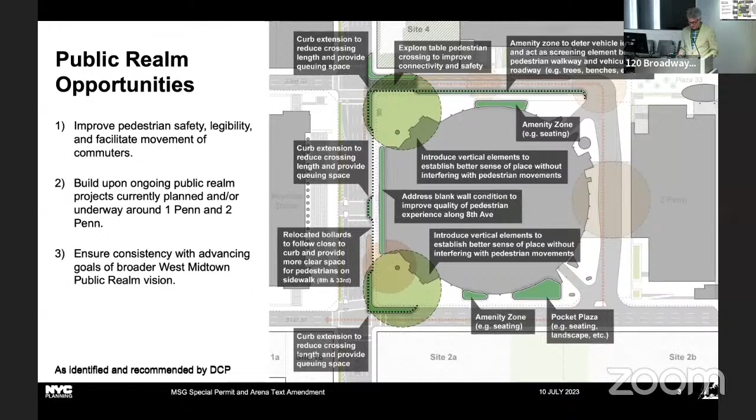Then we have the 8th Avenue frontage, which is literally a blank slate, and this is a great opportunity to do something related to the civic importance of the site that could be engaging and interesting and have a positive impact on the public realm.

So there's this idea of creating a notable civic entrance on the corners of 33rd and 31st Street for the Penn Station entrances—adding vertical elements to the corners and tying this all together with a unified design, a plan that shows consistency and a hierarchy of signs with improved lighting.

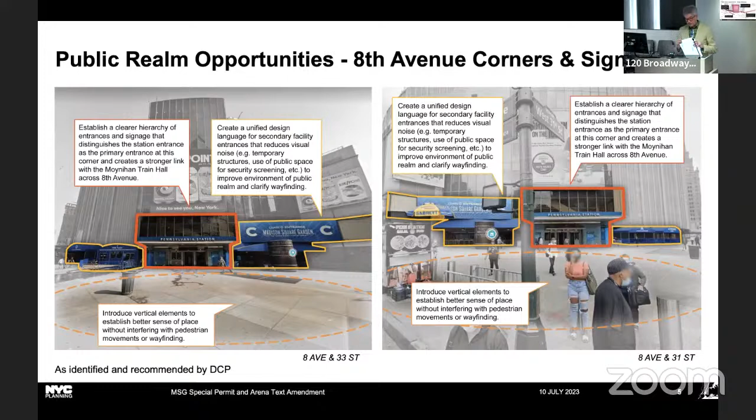And this is the concept drawing that the department put together, like the previous three slides. It's focused on the unified and consistent design and having a notable entrance into Penn Station.

Now I want to take you through MSG's commitments, which came post-public hearing and are in addition to the proposed improvements from February that I showed earlier—the planter benches, bike parking, and the POP signage. They've added a third planter here in the southeast corner at 31st Street in the mid-block.

This really highlights how this could become a significant public amenity with social seating and people sitting around in the landscaping. This is also a southern exposure, so I think this will be very beneficial with direct sunlight and a good landscaping feature here. I think this gives the start of a real POPS feeling—a New York City POPS feeling here.

So that additional planter is very much a concrete idea and design that was too late to include in the proposal. But the next couple of public realm improvements and commitments are more on a conceptual level.

This is one of those, from their most recent letter to the Commission, just last Friday on the 7th. The applicant has proposed a design concept of a 3D lenticular wall, or art wall. This particular concept has different views depending on where you're sitting or standing and what angle you're at. It will not have any advertising or accessory signage, but it will be related to celebrating the city and highlight the civic importance of the site.

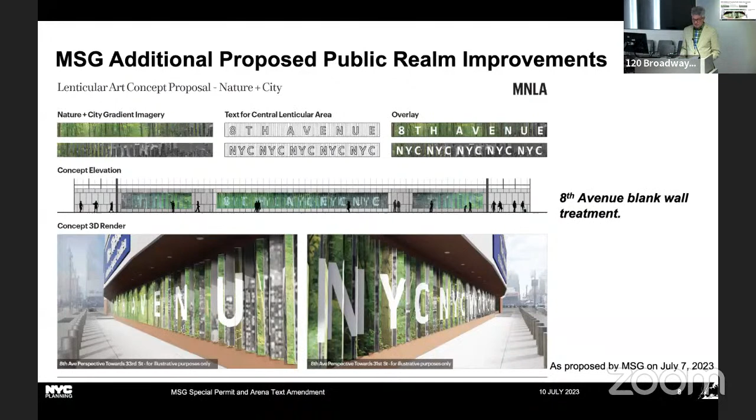The applicant has committed to providing a unified signage scheme and design language related to the signage and canopies, and they've retained a graphic design firm to do this. They have a preliminary concept design proposal to allocate space to Amtrak to put up some Penn Station signage at this corner, or both corners on 8th Avenue. This would make a more significant entrance, a grand entrance into the station on the 8th Avenue corners.

These show a glass canopy with lighting, the letters up, the name Penn Station, and obviously it's much more identifiable than what there is today. These canopies could extend over the plaza areas on the corner spaces and have a lighting scheme to illuminate them and highlight the station, reinforcing the relationship between the public spaces and Penn Station and giving these entrances a more prominent civic importance on the site. So now you can walk down the street and you won't be saying, where's the entrance to Penn Station?

We have discussed among the commissioners MTA bollards on the site, which MSG does not control. But we've also discussed how there are metal barriers littered everywhere around the site. You can see them here around security features, against the trucks, and you can see that woman with her luggage standing next to one. I've witnessed people trying to walk around with their luggage in that area, and it's very difficult, and you're not exactly sure where you're supposed to be going.

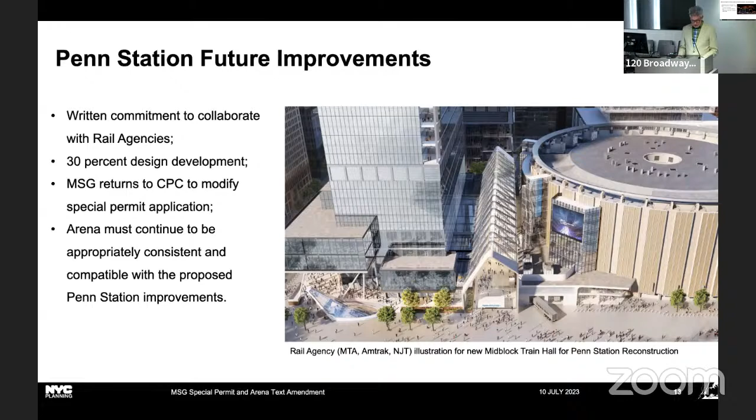The applicant, MSG Arena LLC, requests a special permit to allow an arena with a capacity in excess of 2,500 seats. The requested action would facilitate the continued operation of the MSG Arena. In conjunction with that application, the department is proposing a text amendment as modified to amend this arena's special permit to incorporate additional required findings related to public spaces, open areas, loading operations, and the consistency and compatibility of an arena with transit facilities.

The two chair certs that are up on the screen are set up so that if the application is approved, then the applicant would have to return within 6 months and submit a proposal. It doesn't have to be approved in 6 months—they just have to submit something to Dan, to the chair, for review.

The department believes that with these improvements the applicant has proposed related to the public realm, and their commitments to further public realm improvements, the loading operations, and the transit improvements, MSG has met the findings as modified. The department believes these modifications to the text amendment related to the chair certification process and the requirements for the public realm and transportation management plan will ensure further development of these proposed improvements, and that they are also consistent with the applicant's commitments.

Regarding the special permit term, the department recommends a 5-year term. The purpose of the term is to allow for a reappraisal of whether the use continues to meet the relevant findings and conditions. This is a very complicated history here, and it's going to be a very complicated future at the site also.

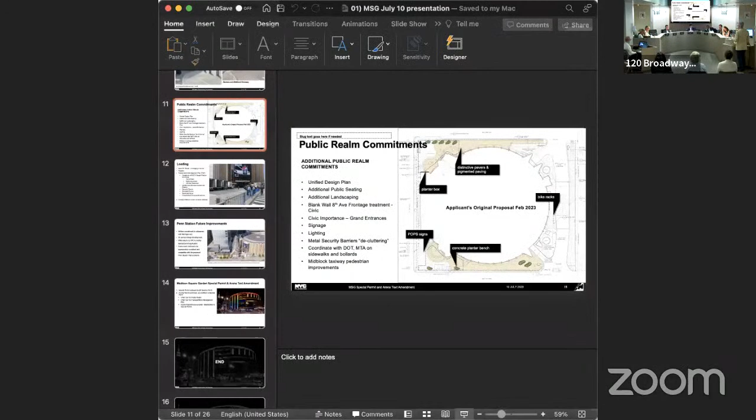Sure, go back to that slide. The issue is the things they proposed in February—they also have time to implement those proposals, because that's something they can't just make appear out of nowhere. They have to fabricate the planter benches, they have to get the design ready for everything. So it's not something that can happen quickly.

So there's a window when they can do that too, which is approximately 2 years. And with the chair certs, that 2-year window starts when those two sets of chair certs are approved.

So when you look at these particular ones, they don't yet have a unified design plan. They've identified one location for additional public seating and landscaping, which is that third lima bean-shaped planter. They've identified some concepts of what they can do at 8th Avenue on the frontage, but they haven't come to a resolution on it, and we haven't reviewed anything.

Same with the entrances to the station, the Penn Station entrances. Similar with the signage, they've hired 212, a graphic design firm, to come up with a plan, and that's just initiated.

They just started that. The metal security barriers are something that they're looking at right now, because those are movable and those are not on any plan. So there's no official site plan that has a bunch of metal barriers on it. So they've agreed to look at that and make improvements and declutter that right now.

And then the coordination with DOT and MTA on sidewalks and bollards, that's a future phase when there's funding to extend those sidewalks out. And then the mid-block taxiway pedestrian improvements, they just suggested that on Friday. So I don't think there's anything in particular that's planned or coherent yet to review on that either.

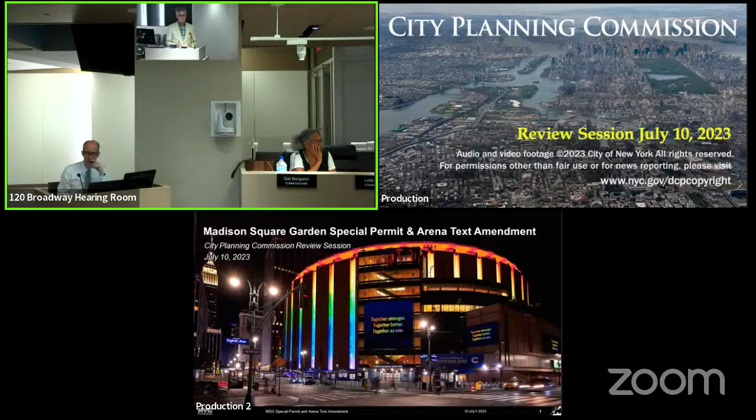So what happens if the chair rejects it at that time? Assuming they come up with a 6-month deadline and the chair rejects it for some reason, that there was no agreement, the language wasn't the way it should be, what happens? The city controls the TMP, working with MSG. So if they're not submitting something that ends up being an approved TMP, then they'd be in violation of their special permit findings and conditions.

So I guess the answer is that they have to come to some kind of conclusion within that time. MSG does, but DOT does not.

We've got other people on the list, so did you have other questions? I'm going to wait - Commissioner, you're going to wait? Okay, Commissioner Cerullo, you're next. Okay.

Stephen, first I share Commissioner Benjamin's compliments to you and to the team, so I just want to begin with that. And I don't want to set the conversation back, but I need some clarification, and maybe the timing is actually appropriate based on this conversation. Could you just clarify exactly what's supposed to happen?

We act this week, the council acts within the next 4 weeks. What's the first threshold trigger date for what occurs next? Is that the 6-month trigger? Yes, that's right. And at that time, what is expected to occur exactly?

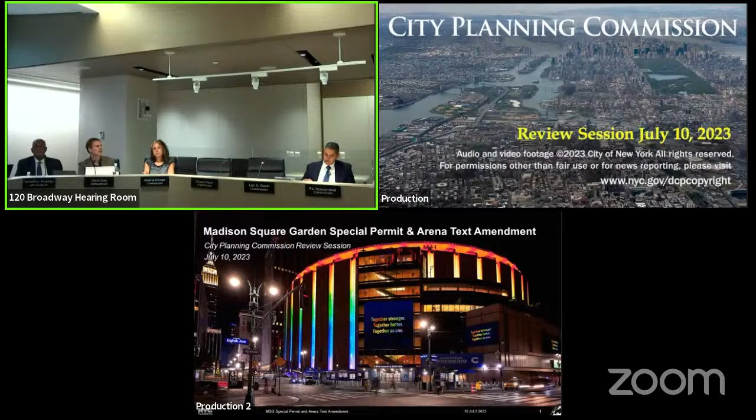The reason that when we think about design development as a threshold, who's to say what 30% really is? So do we have maybe some benchmarks, or maybe we should think about writing in benchmarks of at what point they come forward, because candidly, they may see 30% as a different point than the rail agency, and we may see 30% differently too. So just curious if there's a way—I'm really just thinking about this from a compliance standpoint of simplifying it and making sure everything doesn't seem to be negotiable and arguable. Can we make things more clear for everyone by perhaps picking a couple of benchmarks there? Maybe it's completed plans or something.

Sure. So when we spoke with the rail agencies about this, we asked them specifically about the 30% design, and they gave us a whole slew of their own projects that proceeded along with this idea of 30% design development. We talked about Tappan Zee Bridge. They talked about some of the Metro North stations. And then we consulted other city agencies, and they said this is completely standard, normal, wasn't anything unusual about it. And I think the tension there is more, as you witnessed at the public hearing, MSG is saying we don't have enough information. Clearly they might not have enough information now at this point, but then there's the question of, are they going to say that when the rail agency says that we have 30% design?

But that's also something that's going to be discussed with city planning and the commission, and we will have different people consulting with us about whether that 30% design standard works, and whether the rail agencies are asking too much or not enough, or MSG is refusing to do something, or they're okay with it. So I think we have built into the system that the review of the 30% design and then the review by the commission of the modification will give everybody that information about what the different parties think about it. I would also add that for non-ULURP modifications, the typical thing we see to have enough information to know what's actually being modified on the site plan—we've had non-ULURP mods recently—is at 30%. It's a conceptual thing.

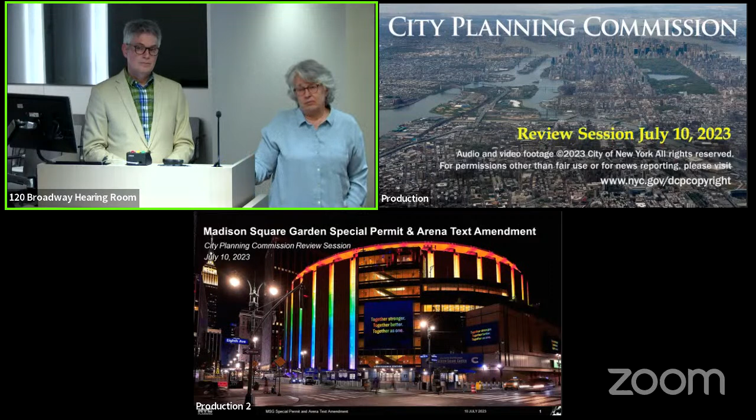I guess the question is, how do we keep some flexibility in case the council comes back with something that wasn't originally planned for? Well, the council can come back with certain things and if they're within scope, they can do it. So we'd have to wait to see what they might come back with, like additional requirements.

Presumably, we'd want to know that they could be done within the 2-year time frame, whatever that might be.

Thank you, Commissioner. Commissioner Kirmani? Thank you, and thank you so much for all the work. Just as I'm listening, it's so complicated, and 2 years, 30%, all of this stuff, and MSG

hasn't provided, because they don't know yet, a phased design plan, like what's going to happen first, what's going to happen second. I'm thinking both in terms of a communication tool to the public, since this is such a hot issue, and also a communication tool for us. I'm sure there will be a work plan, there'll be a million work plans, but can we ask for kind of a simple, dare I say, tool, as they begin to decide what to do first? What would a phased design plan be in the 2 years, even if it changes, but something that we can look at, and the public can also use to communicate with the public, like, I'm oversimplifying, planters going in now. Next thing is this.

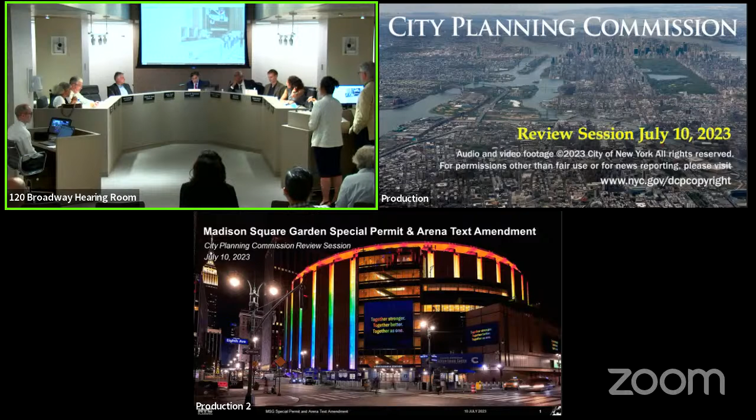So in other words, no agreement, no 30%, no trigger. No rehab of Penn Station. No rehab of Penn Station, but we need them to come to an agreement in order to proceed. So we're all rooting for them to get to that very important place so that we can get that grand new Penn Station, and also we have the opportunity to revisit this question about MSG's compatibility.

And what happens when they submit to the department their 30% plans? What is the next step? The department reviews the plans, the commission reviews the plans, comes to an understanding of... Does the commission review them? In what way? To review whatever the submission is.

This would be a non-ULURP modification, essentially, is how we'd look at it - that MSG would submit documents attesting to how they would in the future still meet the findings of the special permit, given the revised site plan, which would be the 30% documents that we'd receive from the MTA or from the rail agencies. And that would go through a process. We refer those out to the community board. They come back usually in 60 days, and then there is an assent by show of hands to send a letter to the Department of Buildings that this is a non-ULURP modification to a site plan that is approved.

Or not. Or not - it's still a discretionary action. It seems like that 30% mark and the plans will become the subject of a large debate and hearing and process. It doesn't feel like we're anticipating what's going to happen and the amount of public debate there needs to be, if this is essentially the first time the public is going to see the proposed new Penn Station.

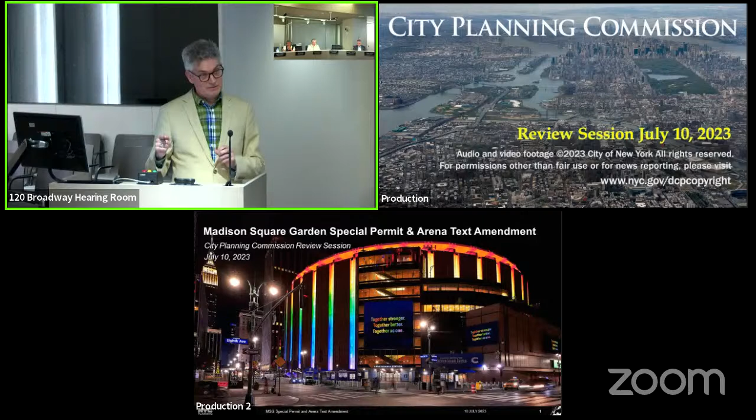But however, what does impact Vornado is their loading, because they load on the south end of the mid-block driveway. So anything that takes away their loading operations—they don't do much loading there, they do it mainly over on 1 Penn—but that still would be impacting their loading operations.

Well, where is the loading for all of the retail that's below grade? How do they get their stuff? It depends on who's got the retail.

So Amtrak uses the southern internal entrance into the arena. They have that internal bay. Trucks park on the street if they're coming in and out quickly. If it's MSG and they have smaller trucks, they can go on into the building.

And then Vornado—Vornado's been talking about how they're going to get some of their retail sites going. That would probably go through 1 Penn, because they have a nice loading facility below that building.

And the underground retail that's in Penn Station, how do they get their deliveries? So they would use the internal loading bays inside the arena, because Amtrak controls the southern entrance access into the loading bay, the internal loading bay at the arena.

We thank everybody for their attention and comments. Ryan, let's move on to the normally scheduled agenda, the certifications on the list. The second item on our agenda is the certification of a zoning map and zoning text amendment in Staten Island Community District 1, and our presenter is Kari Bailey.

Hi, good afternoon, commissioners and Chair Garodnick. Can you hear me? We can hear you fine. Great. My name is Kari Bailey, I'm the Staten Island Borough Planner, and I'm presenting 541-545 Bay Street, which is a rezoning and extension of the Special Bay Street Corridor District, also known as SBSC for short. Next slide, please.

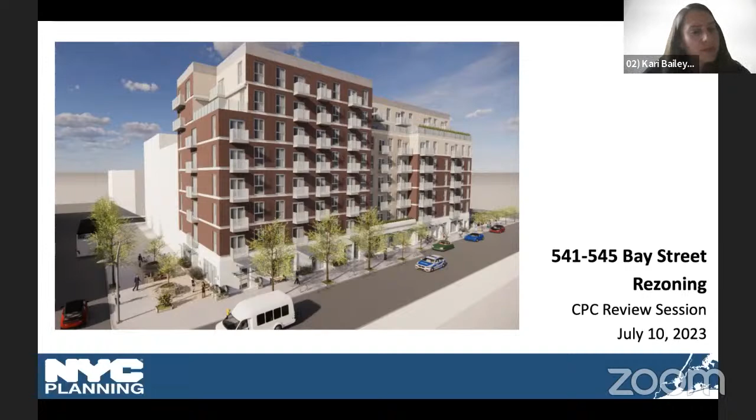This is in Staten Island Community District 1, the Stapleton neighborhood. A private applicant, Epsilon Enterprises Realty, LLC, is requesting the following actions: first, a zoning map amendment rezoning their development site and the surrounding properties from C4-2 to R6 C2-3; second, a zoning text amendment to make the affected area part of the Special Bay Street Corridor; third, a zoning text amendment to make the affected area part of Mandatory Inclusionary Housing; and lastly, amendments to the bulk provisions of the Special Bay Street Corridor, which affect primary street frontage and height regulations for a particular block.

These actions would facilitate the proposed development of an 8-story mixed-use building with 10,000 square feet of ground floor commercial, 81 residential units above, 24 of which would be affordable, and a rear parking lot providing 42 on-site spaces. Next slide, please.

The Special Bay Street Corridor District was adopted in June of 2019. The goals of the district include creating a vibrant, resilient downtown, providing stronger connections to New York Harbor and surrounding neighborhoods, and supporting the creation of new housing, including affordable housing, for a wide range of North Shore residents. It also aims to foster new and existing businesses and commercial development by encouraging job creation with a pedestrian-friendly retail commercial corridor between St. George and Stapleton. Lastly, the goals of this district also align investments in infrastructure, public open spaces, and services in the Bay Street corridor to support current demands and future growth.

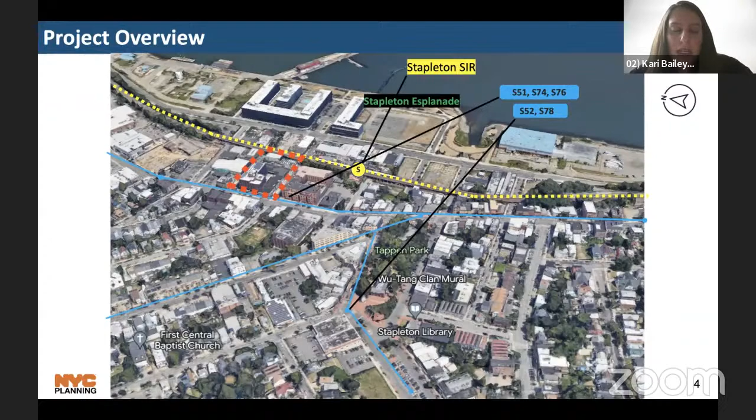The 5 bus route stops are within less than a 5-minute walk from the site, and a bus from this area to the St. George Ferry Terminal is about a 10-minute ride. The site is within minutes of the Staten Island Waterfront Park and Esplanade, and consequently is in the flood zone. Nearby points of interest include Tappen Park, the Wu-Tang Clan Mural, Stapleton Public Library, Makerspace NYC, and the Canal Street Waterfront Observation Deck. In this image, you can see the recent Urby development, the U-shaped building along the waterfront, which started its phase 1 in 2016. That development comprises 571 apartments, 35,000 square feet of ground floor retail, an urban farm, common spaces, 600 parking spaces, and a public plaza. Next slide, please.

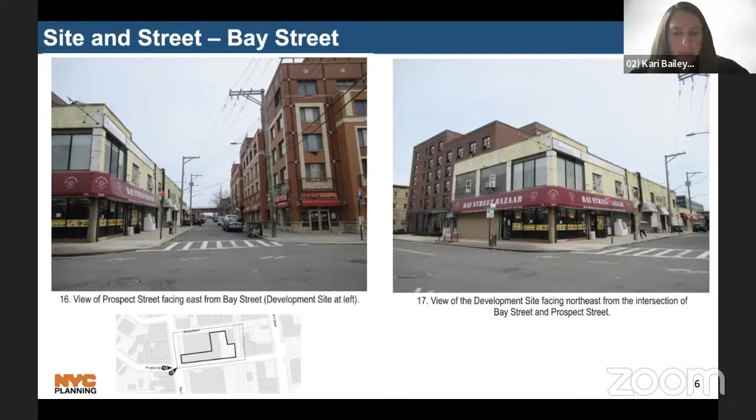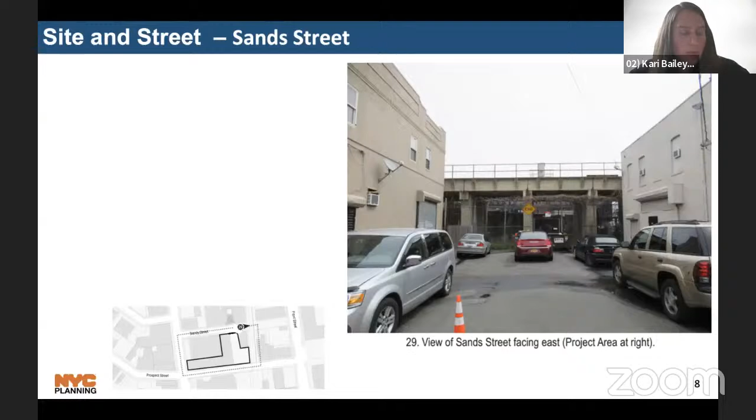The proposed development would have an 8-story building fronting Bay Street, a 6-story building fronting Prospect Street, and a 6-story building facing Sands Street. The total zoning area is 8,448 square feet with 81 housing units, 10,000 square feet of commercial on the ground floor, and 8,740 square feet of parking in the rear for 42 cars.

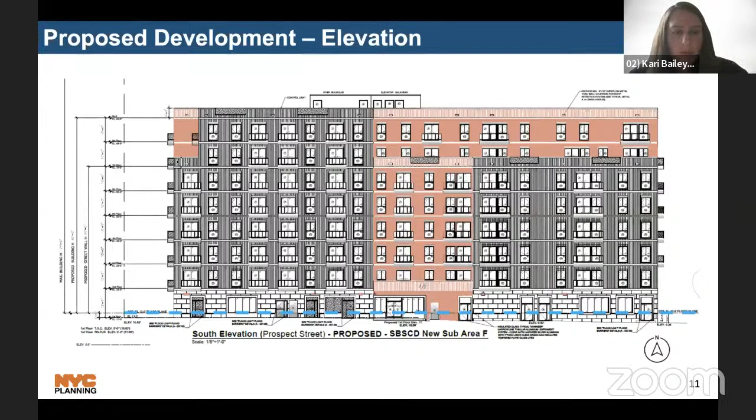The second and third project actions include a zoning text amendment to add sub-area F as part of the Special Bay Street Corridor District and add the area to mandatory inclusionary housing. In the L-shaped development site, it is proposed to use MIH option 1, which would provide 24 affordable units and 57 market rate. However, option 2 and the workforce option would also be mapped in the larger rezoning area. In option 2, or the workforce option scenario, 25 of the apartments would be made permanently affordable, with the remaining 56 to be market rate.

And the final zoning action is a text amendment to the bulk provisions of the Special Bay Street Corridor affecting primary street frontage and height regulations for a particular block, which I previously mentioned.

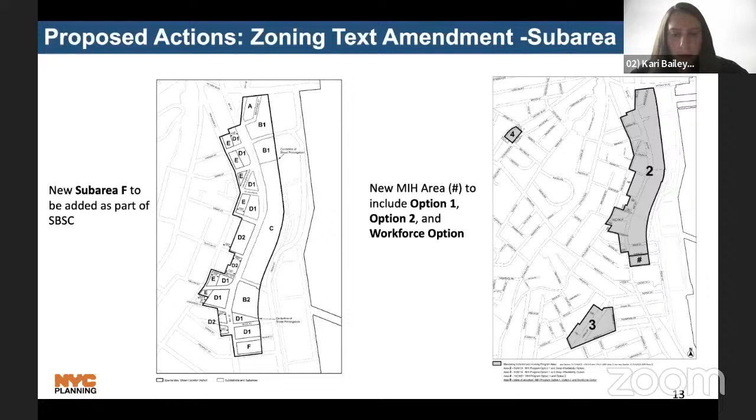I made a note, I think that's the real life picture. Okay, so if you look at the picture to our right, that's the building that's going to come down. You referred to that as being in the street bed. The building to the north of it, the newer residential building, is set back - it's hard to tell in this picture, but it's actually set back. So are we considering this building now as technically in the street bed, or just built on the sidewalk? I'm confused by that. Technically it looks that way, and it is that way, but in the record of the map, it is considered to be the street bed. So then could we assume that even this existed probably before and kind of got grandfathered in? So what we're really saying is that the sidewalk is in the street bed as well - it's just not built to the actual mapped width of the street. Okay, I just wanted to be clear on that, because I know it's going to match the building to the north of it from a sidewalk point of view and a setback, which I agree with completely. So I just wanted to understand that.

There are going to be 3 buildings as part of this development. Will they have different addresses given their frontage - I'm assuming one's on Prospect, one's on Sands, and one's on Bay? So will they have 3 different addresses?

That's a good question. I kind of thought it would just be the project, but I'll look into it and get back. Sure, and two are sort of public realm related.

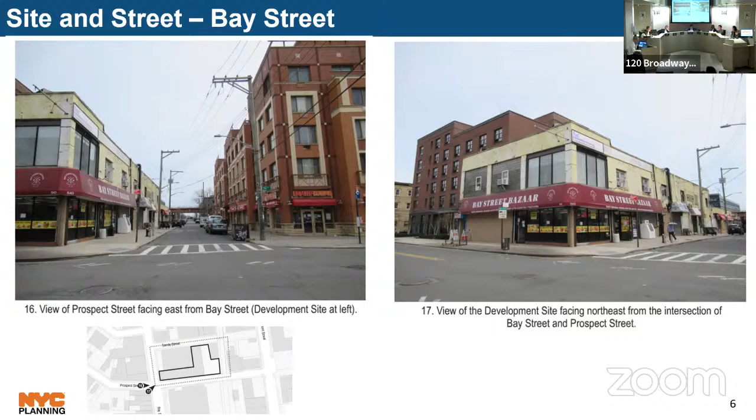You had a photo of the station on Prospect, maybe a slide or two later. I don't remember what slide that was, but I just wonder if there's been any discussion about what can be done to improve this station, given the increase in residential development and use that's going to be part of this.

Never mind people who are encouraging to get out of their cars and come eat in the restaurants in this area, this is actually a really great location for the stop. I just wonder if any of those conversations have taken place.

I'm not aware of any conversations that have taken place, but I can look into it and get back to you. That would be terrific.

And the other is about Sands Street, where you mentioned that's not part of the site, but Sands is the dead end because of the base of the Staten Island Railroad.

This is now going to be the block with an entrance of a residential building. I wonder if there's been any conversations with anyone, whether it's the city or the MTA, who likely owns the land underneath this, to do anything, even if it cannot be opened, which clearly seems to be the case based upon the elevated train here.

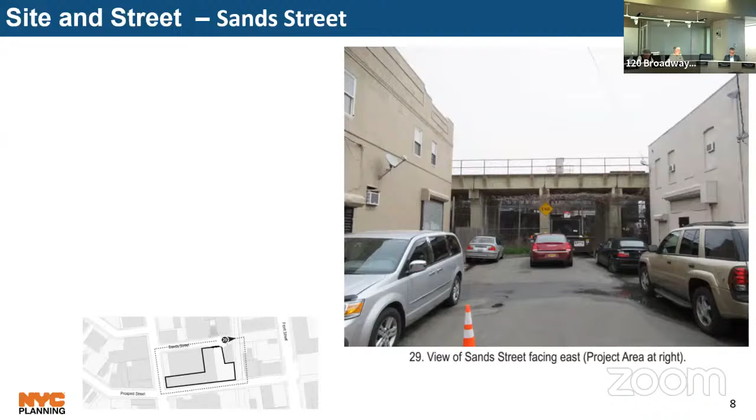We're also mapping MIH here. Why is that necessary if we're extending the Bay Street corridor geography, which is already mapped? Is it because of the new sub-area? Wouldn't it, if we're extending—or are they two separate actions we need to do?

One is to map the geography of the corridor, and the other is to extend the MIH into this sub-area. It's two separate actions. I mean, it's all under the same text action, but it's two separate parts of it. So we have to do the two separately.

Okay, and I like it because I like the options in this one better than the first one, which is where we started. I just wanted to understand why just the extension didn't incorporate everything that had been done in the first part, but it makes sense. All right, I appreciate that.

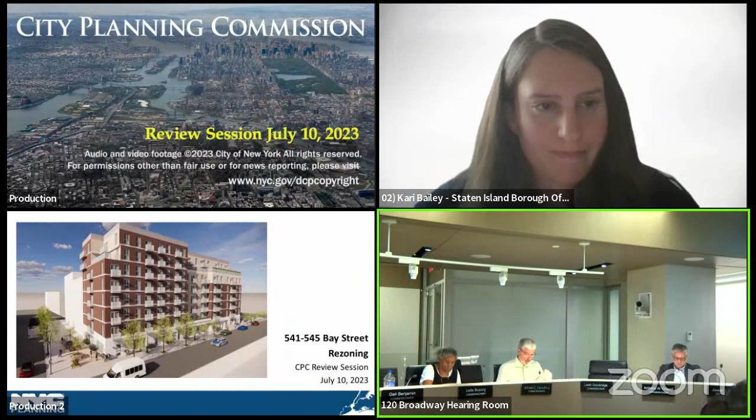Okay, the third item on our agenda is a certification of a zoning map and zoning text amendment in Queens Community District 7, and our presenter is Hai-Kyung Yang. Hello. Good, how are you? Good, almost there.

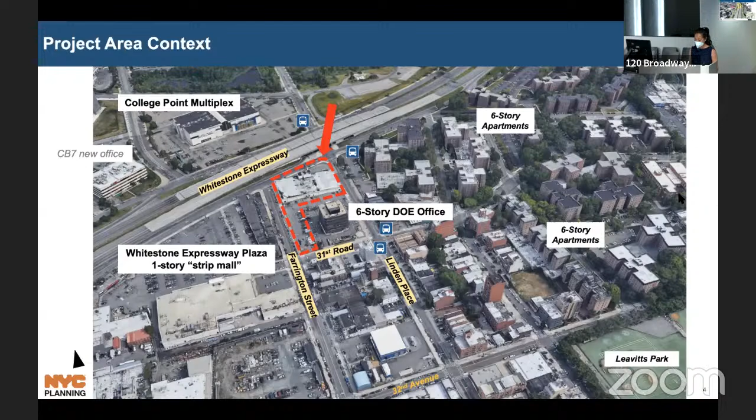This slide is a stitched aerial of the project area. In the dashed red outline is the development site, currently the Whitestone Lanes Bowling Alley. The single-story bowling alley is approximately 37,500 square feet, with surface parking surrounding the parcel. The proposed development site is wholly located within the New York City coastal zone boundary and requires any habitable spaces to be located at 13 feet design flood elevation.

The proposed development would consist of a residential development that will rise to 9 stories and contain approximately 378,000 square feet of area at a 4.6 FAR. This would include 415 dwelling units, approximately 113 of which would be affordable pursuant to MIH option 1. The building would rise to a maximum height of 95 feet and set back at the 7th floor following varied setbacks along Linden Place, the Whitestone Expressway, and Farrington Street fronts.

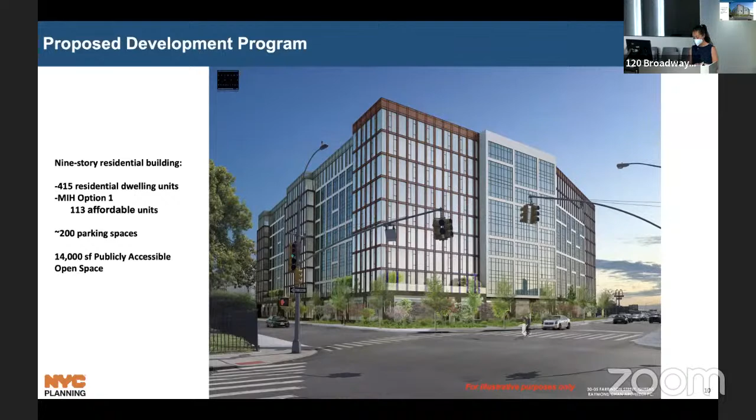The proposed development would also provide approximately 200 spaces below ground for parking, along with 200 spaces for bicycle parking. Lastly, the development would provide approximately 14,000 square feet of publicly accessible open space.

As noted earlier, the development site is in the flood zone. The first habitable floor in the proposed development will be located above the flood plane elevation and follow DOB Appendix G regulations for flood protection.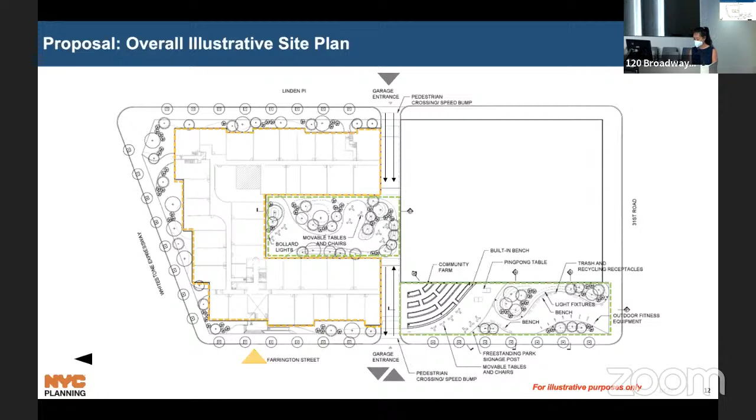The frontage of the development site would include 27 new street trees, and shown at the bottom right of this plan, a publicly accessible area would be provided at the Farrington Street and 31st Road corner of the block, roughly aligning with the dimensions of Lot 1.

The publicly accessible area, shown here in green, has been designed with several sections of activity in mind. This open space is incorporated as part of the development and will be memorialized in a restrictive declaration as a project component related to the environment.

In this specific illustrative proposal, the applicant proposes to have the PAA contain active and passive open spaces, including a range of tree planting and seating. Passive areas would consist of seating and a community garden, while active areas would include fitness equipment and ping pong tables. The space would have hardscape components, which include signage indicating open hours, lighting, trash receptacles, and seating requirements.

As the adjacent DOB building rests at a higher elevation, screening would be provided where the two lots meet, as shown on the far right, section B.

To facilitate this development, the applicant proposes a zoning map amendment to change from an M1-1 district to an R7A district, indicated by the dotted black line on the image on the right. R7A districts produce buildings at a 95 feet or 9-story scale. The transition from an M1-1 to an R7A district allows an increase in residential floor area from none to 4.6 when including MIH units.

This also allows an increase from 2.4 community facility FAR to a 4.0 FAR. The R7A proposal will remove all commercial and manufacturing use group allowances.

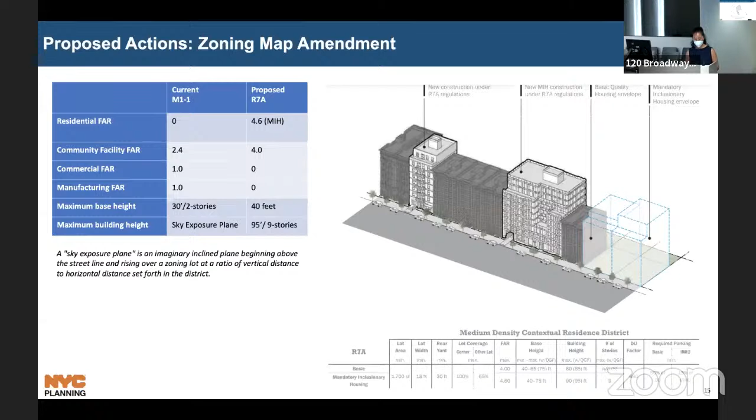The applicant also proposes a zoning text amendment to map MIH option 1 and 2 across the project area. The applicant proposes to utilize option 1 for the proposed development, yielding 25% of residential floor area as 113 income-restricted units.

This application requires a racial equity report because it would increase the residential floor area by at least 50,000 square feet. The AMI for CD7, Flushing, Murray Hill, College Point, and Whitestone area is approximately $55,000, which is lower than the AMIs for the boroughs of Queens and New York City overall.

The applicant proposes to provide 113 income-restricted units across a range of 40 to 80% AMI, with estimated monthly rents ranging from $1,390 for one-bedroom units to $2,780 for two-bedroom units, at estimated average incomes ranging from approximately $57,000 for a one-person household to approximately $115,000 for a four-person household.

Of the approximately 270,930 residents within the neighborhood of Flushing, Murray Hill, College Point, and Whitestone, 50% identified as Asian, 2% identified as Black, 18% identified as Hispanic Latino, and 21% identified as white.

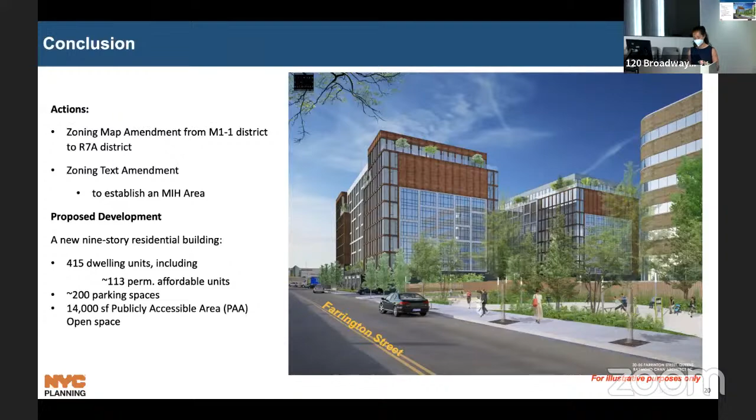Question from Commissioner Rampersad. I'll be quick. Thank you for the presentation. When this comes back to us, if they can provide the breakdown of the number of 1, 2, and 3 bedrooms. Also, what sustainable measures are being used.

I'm just curious, the 14,000 square foot public space, is that the one along Farrington Street? Yes. Is that the area there? Okay, yes. And I want to know the thought process behind that open public area, because it seems like there's a lot squeezed in there.

For example, the community farm, I just want to know who's going to be operating that. Sure, they have a little gym set up there. I'm curious about the thought process as opposed to putting some kind of playground equipment, because the other park has a lot of ball fields. You're talking about 400 families, so I'm assuming there will be children there too. That's it, thank you.

Okay, thank you. Sure, thank you, Commissioner. This item is certified. We'll look forward to seeing it again.

Thank you. The fourth item on our agenda is a certification of a zoning map and zoning text amendment in Manhattan Community District 11, and our presenter is Jose Trucios. Hello, Jose. Good afternoon, Commissioners.

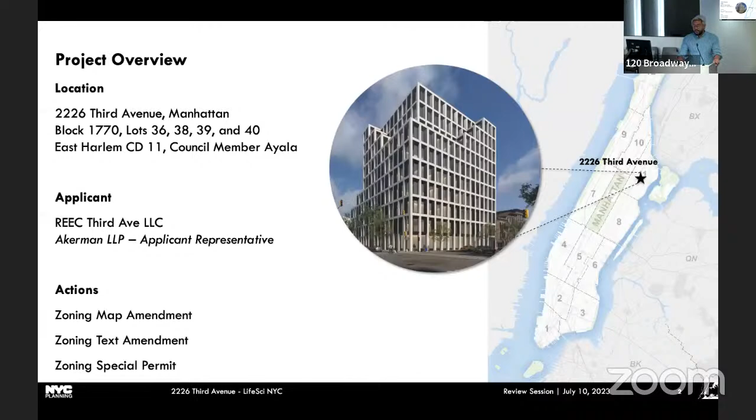Approval of the actions will allow the development of a 10-story, predominantly life science building at 2226 Third Avenue and the southwest corner of East 121st Street and Third Avenue in East Harlem, Community District 11, Manhattan.

The surrounding area is predominantly residential, typified with 5 to 10-story multi-dwelling and high-rise residential towers along the avenues. Primarily underlying zoning districts include C4-6, R7-2, R7A, R7B, and R7D, with commercial overlays on C1-4, C1-5, C2-4, and C2-5, mapped along portions of Park Avenue and Third Avenue.

The zoning in the area features 3 special districts that modify the underlying zoning regulations. Immediately adjacent to the project area is the special East Harlem Corridors district, which is mapped along major corridors in East Harlem. The special 125th district and special transit land use district are located a few blocks north of the project area.

Additionally, within the surrounding area, inclusionary housing and mandatory inclusionary housing designated areas are mapped. These provide affordable floor area incentives to create or preserve affordable housing. The project area is also located within the FRESH zone, which provides zoning and discretionary tax incentives to promote the creation of health-oriented food stores. And last, the transit zone, where lower accessory residential parking requirements apply for certain types of affordable housing.

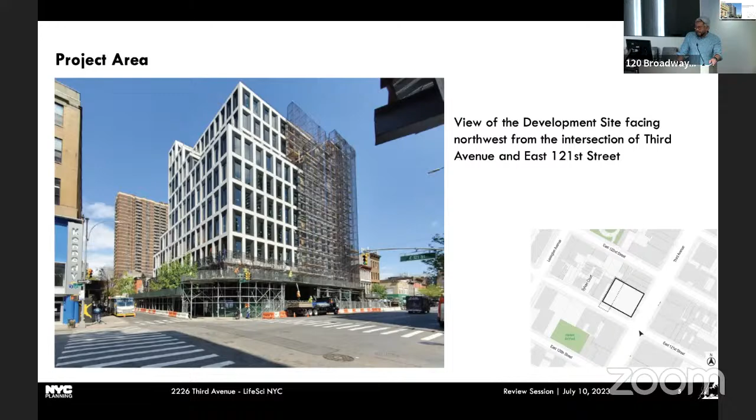I'll look at the actual project area—this is the actual look of the building. This is looking northwest from the intersection of 3rd Avenue and East 121st Street, and now looking from 3rd Avenue between East 120th and East 121st Streets.

This is a view of the development site facing east from East 121st Street. Now I'll look at the proposed development.

Approval of the actions will not modify the DOB-approved plans. However, the proposed development program will change from a mix of medical office and commercial uses to primarily life science type uses. Site preparation work, including demolition of the former commercial building, began in 2021, and construction activity at the development site is expected to be completed by fall 2023.

The portion of the proposed development within 100 feet of 3rd Avenue will be located at the street line and rise to a height of approximately 101 feet before setting back 10 feet from 3rd Avenue and 15 feet from East 121st Street, rising in a step pattern to a total height of approximately 145 feet. The site was previously occupied by a 2-story commercial building occupying 33,000 square feet.

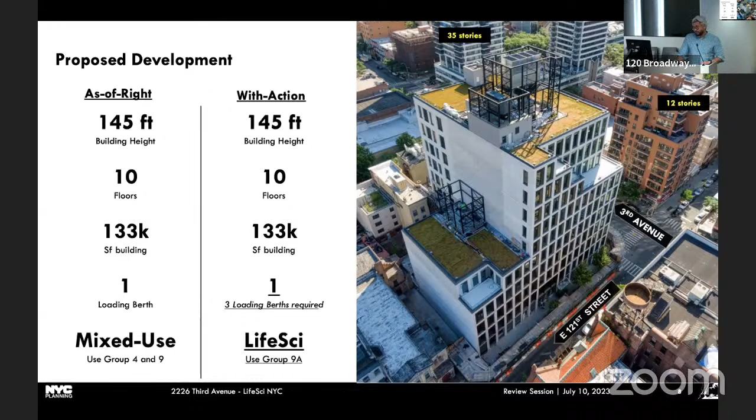Regarding the zoning map amendment: I mentioned that the western portion of lot 36 is the only portion not currently zoned as a C4-6 district. It is an R7B zoning district, and the applicant proposes a zoning map amendment to rezone this portion to C4-6, extending the boundaries of the East Harlem Corridor.

Here's a closer look at the amended zoning map, section 6B, where the zoning boundaries have been extended—the boundaries of the East Harlem Corridor have been extended 50 feet west of the existing East Harlem Corridor boundaries.

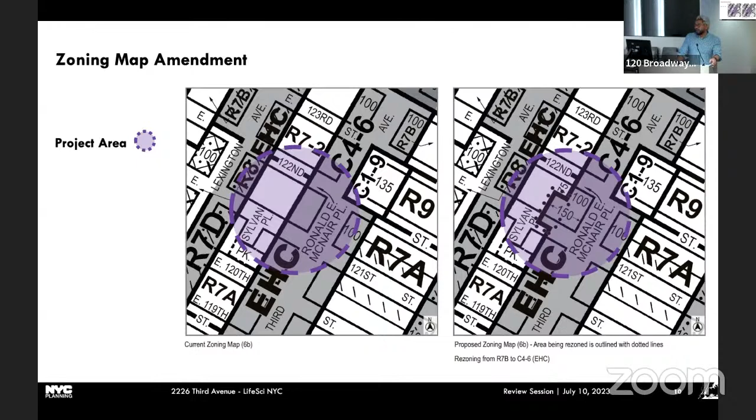The first text amendment will modify Article 13, Chapter 8 of the Special East Harlem Corridor District. This will allow the project area and development site, currently mapped R7B, to be included with a C4-6 district. It will also increase the permitted commercial floor area ratio from 3.4 to 7.2.

The text amendment also maps Mandatory Inclusionary Housing on the development site. Although the project does not include residential floor area, the MIH program will ensure that a minimum of 25% of the residential floor area in any future development that includes residential use is permanently income-restricted.

The text amendment establishes a new zoning resolution loading reduction waiver, potentially allowing the applicant a reduction in the number of loading berths via a City Planning Commission special permit. There are certain conditions related to pedestrian safety, traffic congestion, and the built environment that must be satisfied for the applicant to be granted the special permit.

This comes from Zoning Resolution 36-62, the loading berth requirements, which currently require the applicant to provide 3 loading berths on site. The applicant is seeking to amend the East Harlem Corridor Special District text to effectively reduce the number of required loading berths from 3 to 1.

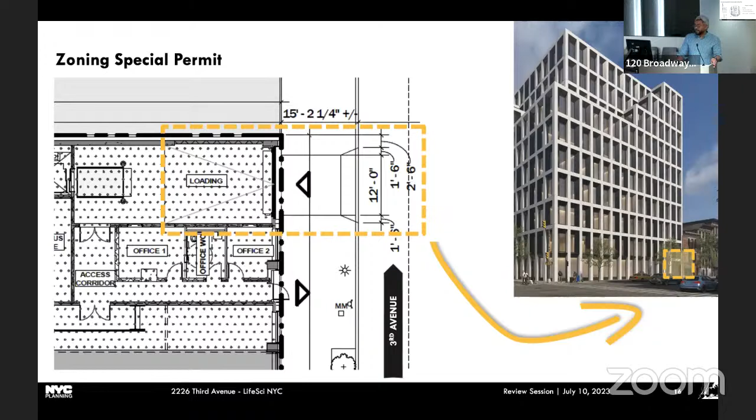A quick summary of the actions. The applicant is seeking 3 actions: a zoning map amendment to rezone the western portion, currently zoned residential R7B, to a C46 East Harlem Corridor District boundary; a zoning text amendment to designate the area with mandatory inclusionary housing; one to map a new zoning section, resolution to a new section within the zoning resolution to allow the reduction of loading berths, and a third one to amend the boundaries of the East Harlem Corridor Special District; and a zoning special permit to apply for the newly created zoning resolution. The proposed amendment will remain very much as it is as-of-right, with the exception that the use will change from medical office space and commercial to primarily a life science building, and 1 loading berth instead of 3 loading berths.

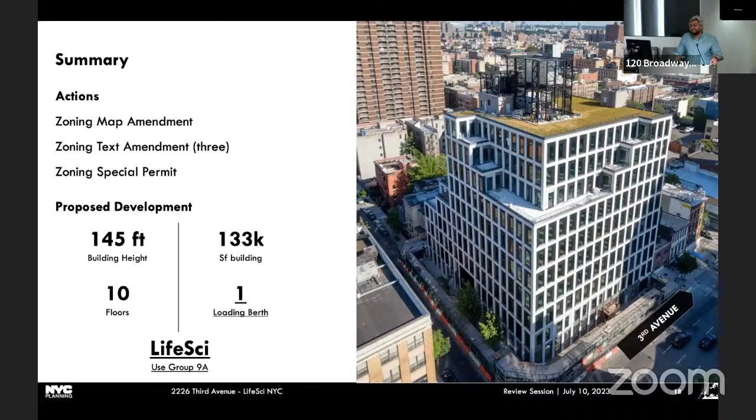Let me just make sure that we're all clear on what's happening. So it is to change the piece of this site that is R7B to make it C46 and make it part of the East Harlem corridor, correct? And as-of-right versus with this change, everything is the same height, number of floors, square footage, but it would require 3 loading berths, which is why we have an associated text amendment to allow for a waiver down to 1, correct? Correct. And it would enable use group 9A, which enables life sciences. In the entirety of the development. In the entirety of the whole building.

Okay, thank you. See if there's other questions, points, anything. Okay, perfect. Thanks, Jose, appreciate it. This item is certified. Let's move on.

The 5th item on our agenda is a post-referral review of a CPC certification in Manhattan Community District 8, and presenting for the first time to the Commission is Ali Song. All right, welcome. Thank you.

Good afternoon, Commissioners. This is a private application by Manhattan Schoolhouse for a CPC certification pursuant to Section 32-435C of the zoning resolution to waive a retail requirement on a wide street, allowing the ground floor to be used as a daycare facility. The site is located at 1538 2nd Avenue in the Yorkville neighborhood of Community District 8.

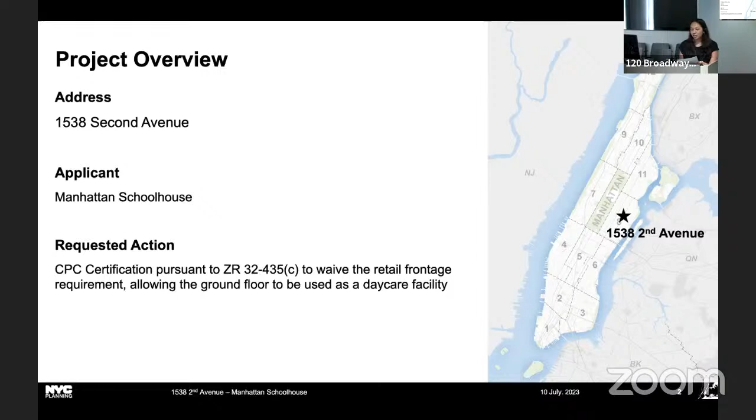This image shows the project context looking northeast at the development site, highlighted here in yellow. The site is located on a block bound by East 80th Street to the south, East 81st Street to the north, and First Avenue. Should I pause? Sure.

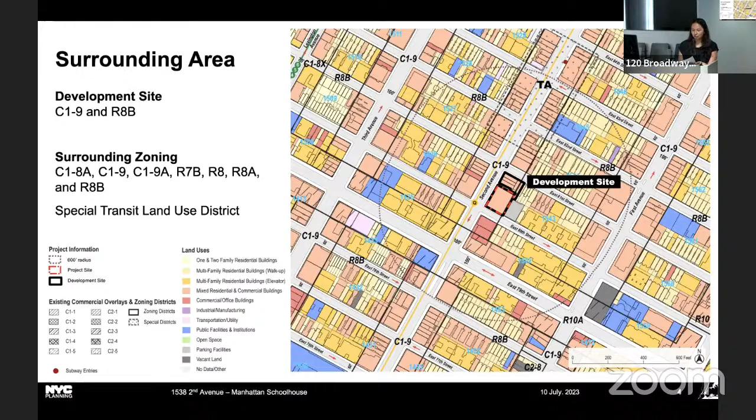Taking a closer look at the development site, outlined here in red and oriented northeast, the zoning lot is composed of 6 tax lots, lots 49, 50, 51, 148, 149, and 7053 of block 1543. Altogether, the zoning lot contains 20,745 square feet.

Lots 49, 50, 51, and 149 of the zoning lot are each improved with a 4-story mixed-use building, and lot 148 is improved with a 3-story mixed-use building. All 5 buildings contain residential uses with ground floor commercial space.

Tax lot 7053 is the largest southernmost lot, located at the corner of 2nd Avenue and 80th Street, shaded here in gray. It's improved with a 30-story mixed-use building constructed in 2019. The ground floor of this building is the subject of the application, where Manhattan Schoolhouse is seeking a retail frontage waiver for a daycare.

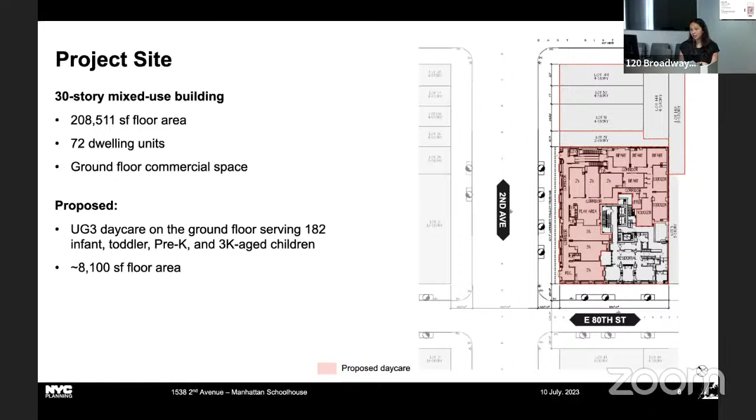Daycare facilities like the one proposed in this application fall under Use Group 3 and are therefore not allowed to take up more than 50% of the building's frontage as of right.

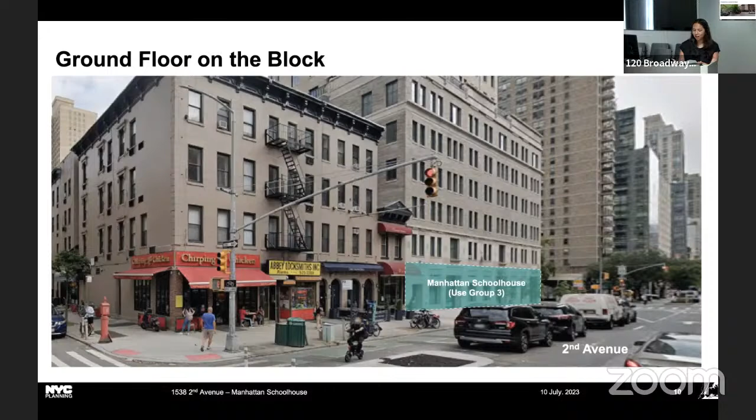Including that an adequate supply of retail uses on the ground floor exists in the surrounding area. The department believes that this application has met the finding and recommends approval. There are several retail uses in the surrounding area, and the applicant further submitted a letter confirming that a good faith effort was made to secure a commercial tenant.

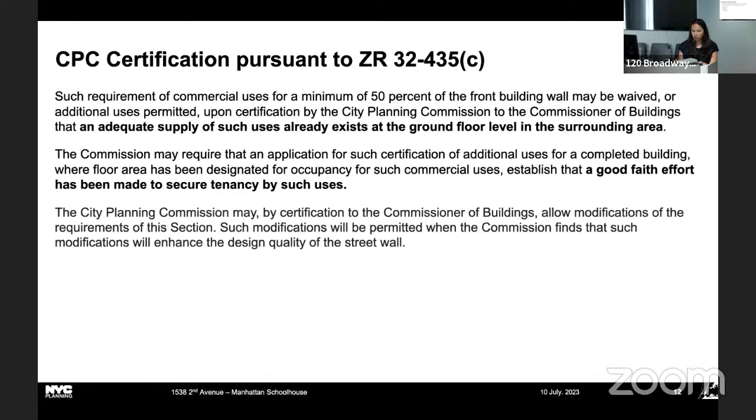This application was presented at the land use meeting of Community Board 8 on June 14th. The board passed a resolution approving the project with 32 votes in favor, 0 opposed, and 3 abstaining.

In summary, the applicant is requesting a CPC certification pursuant to Zoning Resolution Section 32-435C to waive the retail frontage requirement to facilitate a daycare along the full frontage of the building at 1538 2nd Avenue. Thank you, and I'm happy to take any questions.

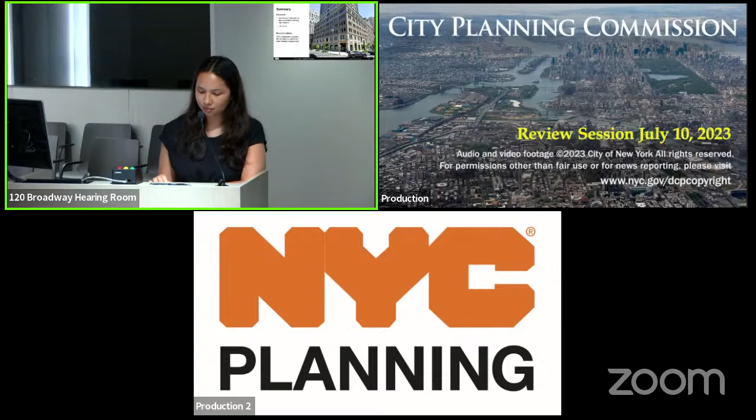This all looks fair enough to me. I just wanted to understand the waiver requirement. So the requirement is that an adequate supply of such uses here, which I guess is retail uses, already exist in the surrounding area. I guess what I'm confused about is what are we supposed to be evaluating here? There's an adequate supply of what? Of spaces that are occupied by use groups 6A, 6C, and 6F? Or is it there's an adequate supply of vacant space? What are we trying to evaluate here?

That there's an adequate supply of the commercial uses in 6A, 6C, and 6F - so retail uses, shops, restaurants, stores, things of that nature. So if I guess what I'm thinking is if you had just a lot of retail vacancy, which I suspect is certainly part of what's going on here, that would suggest that you don't really have an adequate supply of those retail uses because they don't exist, but you also would want to grant this waiver because there's no demand for the space, or less demand for the space. So this is really a question that I'm trying to figure out what this was designed to get to.

It's obvious that they made an effort and were not able to get the conventional 6A, 6C, and 6F in there, so they went for something else. Yeah, I see what you're asking. I think that the way that the text is written, it's asking if there's an adequate supply in the area, which I think that in the case of this application, that's why I showed the surrounding area. You can see that on the streets adjacent, or next to the site, there are these commercial retail uses. But I see what you're saying about how it's written. I think that might be why there's this additional requirement - the commission may require that you provide this good faith marketing effort letter, which the applicant did provide, showing that they made an effort to secure a commercial tenant, but were not able to.

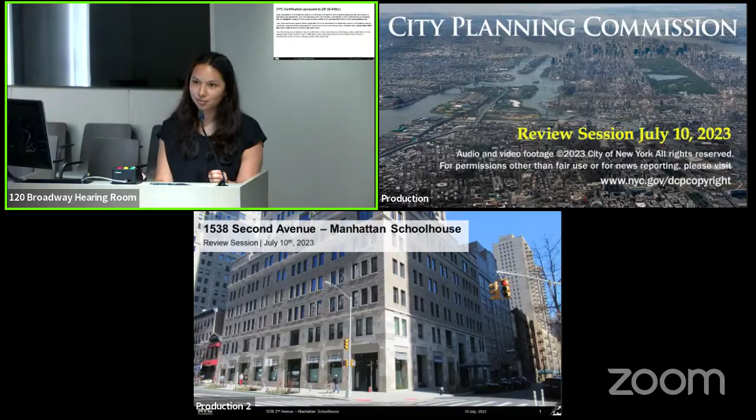Thank you. All right. We are going to do this one by a voice vote here, just to prepare everybody. I've got 7. You got 7? Okay. So we're going to seek assent by voice vote to send an approval letter on this one to the Buildings Department. Everybody ready for that? Yeah, we're ready. Okay, all right, ready. So all those in favor of sending an approval letter to the Buildings Department, please say aye. Aye. Opposed, nay. Okay, the ayes have it. Ayes on. Thank you very much.

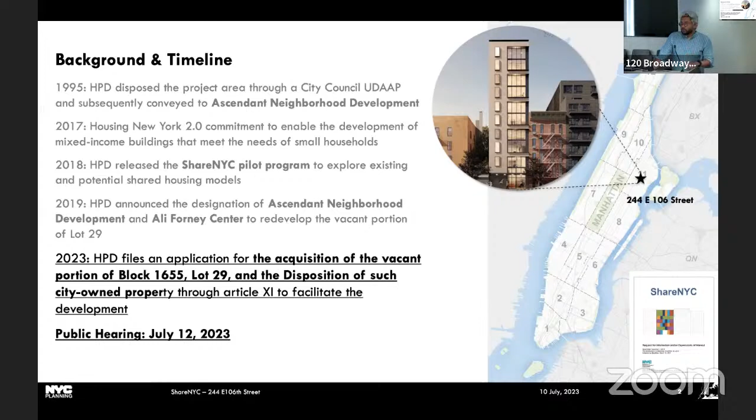In 2018, HPD launched their co-living program, seeking proposals for development. They picked Ascendant Neighborhood Development and Ali Forney, prompting this application for the acquisition of the remaining portion of the lot for subsequent disposition of the lot through Article 11.

Quickly on the project overview, on the right side you can see the existing conditions on the site. As I mentioned, it's only the vacant portion of lot 29, so it's very minimal and limited to about 2,700 square feet. It's a tiny lot that is limited by the zoning resolution to only stand at 100 feet or less, so this building is at 99 feet.

It will be occupied by shared housing, consisting of 2 or more independently occupied rooms that share a kitchen or bathroom, a housing type that can encompass a wide range of configurations and usually includes additional building-wide common spaces, designed to encourage the sense of community and create a home-like environment.

The proposed development will contain approximately 21,000 square feet of total floor area, including 19,000 feet for shared dwelling units of nonprofit institutions for sleeping accommodations, use group 3, and about 3,000 square feet for community facility for supported social services. This translates to 4 shared housing units, 1 superintendent unit, creating approximately 32 affordable rooming units.

No accessory off-street parking will be provided. It's not required for affordable units within the transit zone, within the special transit district.

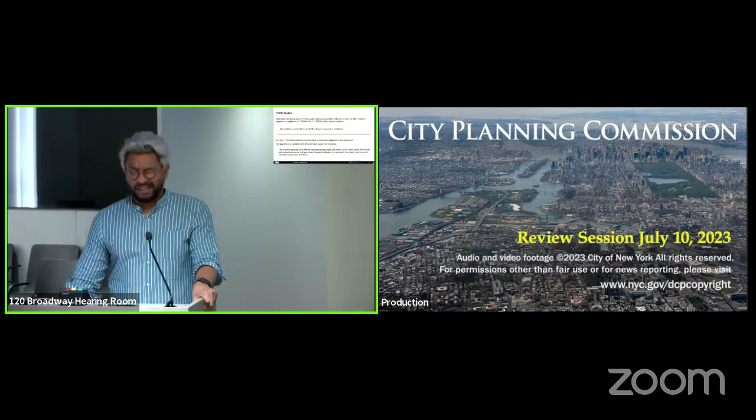So this one will be up for a public hearing on Wednesday. The applicant is who? HPD, HPD is the applicant here. Development team? Okay, great, I believe they will be here on July 12th, sending as well. Terrific. We'll pick it up on Wednesday. Thanks, Jose. Thank you. All right, let's move to the next pre-hearing item.

The 7th item on our agenda is a pre-hearing review of a zoning map amendment in Staten Island Community District 3. Our presenter is Amy Obanaga. Hi, Amy. Hi, good afternoon.

This is a private application seeking a zoning map amendment to zoning map 33C and several non-ULURP actions pursuant to Special South Richmond Development District to facilitate the conversion of Block 4645 from a community facility use to a commercial use. The proposed zoning map amendment would amend existing R3-2 to an R3-2/C2-1 overlay.

The project area includes a development site, Block 4635, Lot 425, on the left side of the screen, which is part of a larger zoning lot that includes Block 4635, Lots 405, 410, 418, 405. The parcel is zoned R3-2 with a portion in a C2-1 commercial overlay on the east end of the zoning lot.

As background, in 1998 the CPC granted zoning certification authorizations permitting development of the shopping center. In addition, in 1999, a modification was granted for the retail development of 2 parcels. Again, the proposed zoning map amendment would amend an existing R3-2 to an R3-2/C2-1 overlay. The proposed action would affect the development site as well as Block 4640, lots 405, 418, 425, and 995.

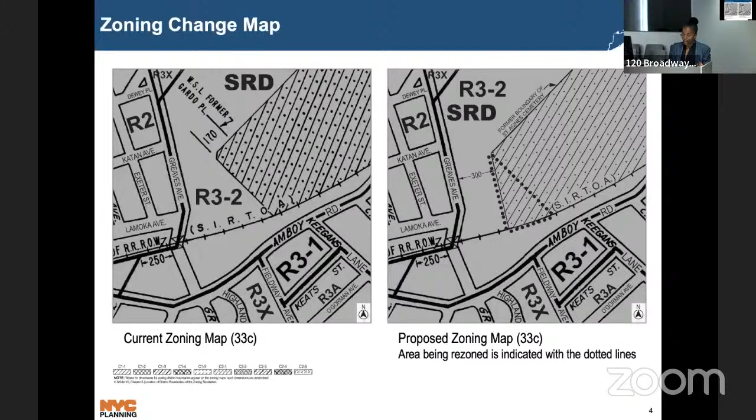Staten Island Community Board 3 voted on May 23rd, 2023, recommending approval of the application by a vote of 23 in favor, none opposed, no abstentions, and without conditions. The Borough President of Staten Island submitted a favorable recommendation without conditions as well.

To summarize, the requested action includes a zoning map amendment to establish a C2-1 commercial overlay on an existing R3-2 zoning district at 125 Greaves Lane in the Bay Terrace neighborhood of Staten Island Community Board 3.

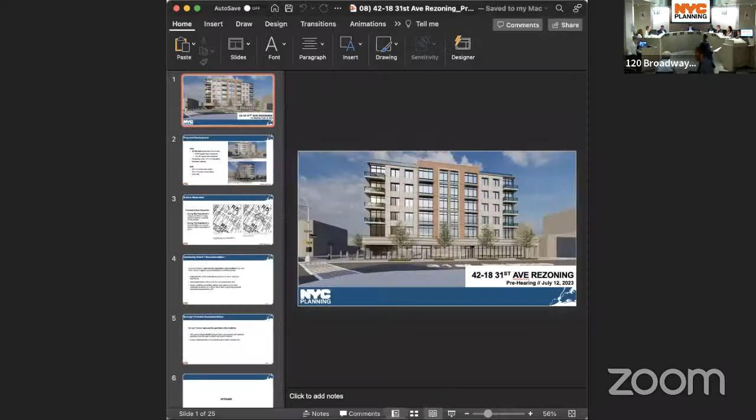I do not see our presenter for the 9th item. We'll ping them. Oh wait, the 8th item, never mind. The 8th item on our agenda is a pre-hearing review of a zoning map and zoning text amendment in Queens Community District 1, and our presenter is Teal Daly. Chair, just for the record, I'm recused in this matter. Commissioner Rob Shaw is recused. What's the problem? Is Orlando here? We're okay. 2, 3, 4, 5, 6, 7.

Good afternoon, Commissioners. I'll be sharing a pre-hearing presentation for the 4218 31st Avenue rezoning. This is a private application in Astoria, Queens to facilitate an approximately 38,000 square foot apartment building with ground floor retail. The proposed development would have 33 housing units in a 6-story, 3.5 FAR building.

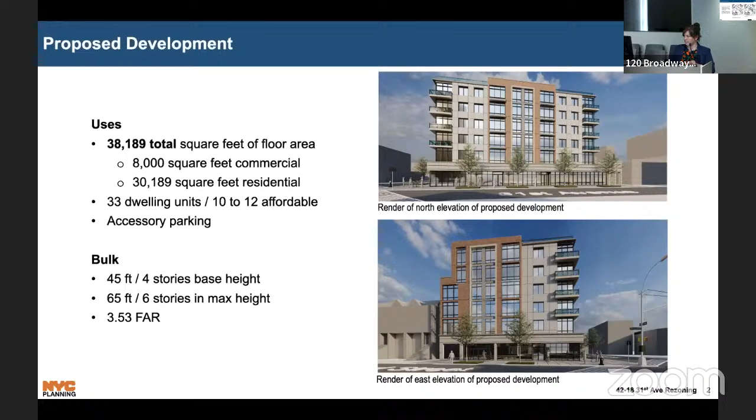Between 10 and 12 of these units would be income restricted. The applicant requests a zoning map amendment to change an existing R5 district with the C1-2 overlay to an R6A district with the C1-3 overlay and an R5 district. The applicant also requests a zoning text amendment to map a mandatory inclusionary housing area with options 1 and 2. To answer a question from certification, I'll note at this time that the pre-war building on the north side of 31st Avenue, which is located outside of the project area, is a rent-stabilized building.

Community Board 1 approved the application by a vote of 34 in favor, 2 against, and 2 abstentions. Conditions include designating half of the floor area for family-sized units, installing solar panels on the roof, and constructing a publicly accessible open space with any future development on Block 694. This last condition builds on a development proposal for this project when there were 2 applicants. The proposal was presented to the Community Board, but since that time, the second applicant removed themselves from the application.

The Borough President approved the application with conditions, including working with minority and woman-owned business enterprises, hiring local residents for construction and management of the building, and exploring implementation of a composting system within the development. This concludes my presentation. I'm happy to take any questions.

Commissioner Benjamin asked: in the apartment layouts, did they in fact fulfill the request for larger family-sized apartments? The presenter responded that they've only seen a submission from certification, and that condition came during the community board recommendation, so they haven't gotten new illustrative floor plans, but it's a question commissioners are welcome to ask the applicant on Wednesday.

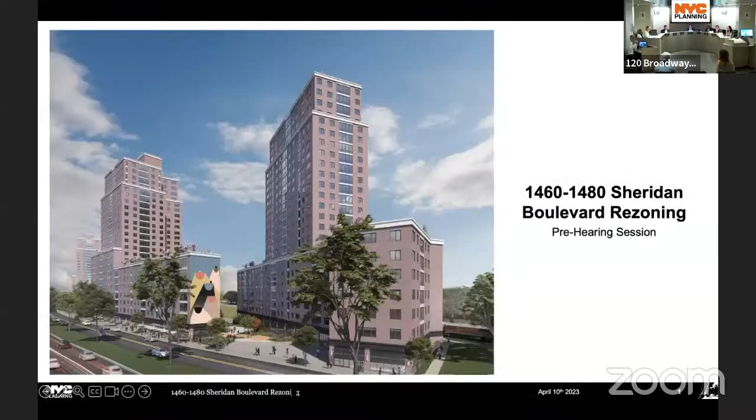Okay, Ryan, let's move on to the next one. Thank you, Teal. I will call it, but I do not see the staff here yet. The 9th item on our agenda is a pre-hearing review of zoning map and zoning text amendment in the Bronx Community District 9, and our presenter would be Cesar Delgado, joined on Zoom or something. Alejandra, do you know if Cesar is here? She wants upstairs. Okay, can we skip it and go to the next? Yeah, sure, we can wait till he gets here, and when he gets here, we'll just.

The 10th item on our agenda is a pre-hearing review of a letter of intent to acquire office space in Brooklyn Community District 2. I believe Kyra.

Okay, we will. All right. Yeah, we want you to do it, Dan. Okay, Ms. Kyler here? All right, 532 Fulton? Sure.

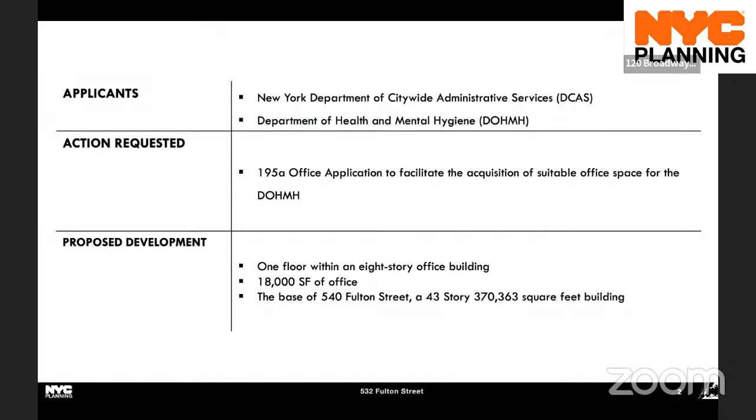Okay, let's go back to the Bronx. Are they here? Okay, let's keep going. Go ahead, Alejandra, we'll just have you do it. It's short, but there are some important things we wanted to cover with the commission. Yeah, so we'll get the.

Yes, thank you very much. That's very good for a first time, presenting for the first time in the commission. Or any time. Okay, Ali, go ahead.

Good afternoon. This is a pre-hearing for 1460, 1480 Sheridan Boulevard rezoning.

The applicant, Simon Companies, is requesting a zoning map amendment and a zoning text amendment to add a new MIH zoning area at 1460, 1480 Sheridan Boulevard, located in Crotona Park East in Community District 9 in the Bronx. These actions will facilitate the proposed development.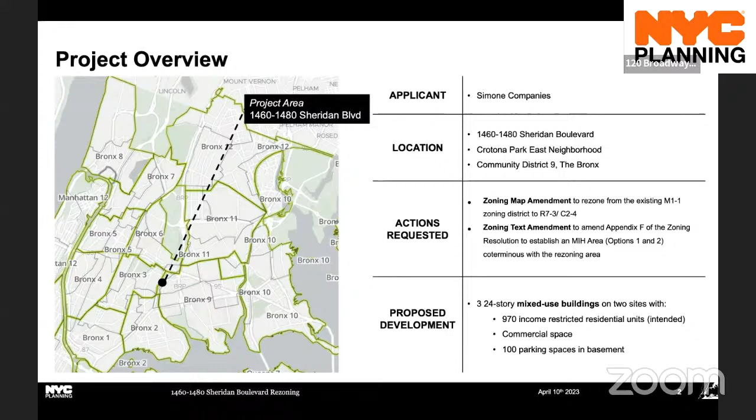These actions will facilitate the proposed development that consists of two sites that will be developed with 24-story mixed-use buildings. They will contain in total 970 intended to be income-restricted dwelling units, approximately 21,000 square feet of commercial space, approximately 100 parking spaces in the basement, and approximately 56,000 square feet of public access area.

Good afternoon, sorry for that. This is Site 1, 1460 Sheridan Boulevard. It will be developed with one 24-story building containing approximately 304 units and 5,000 square feet of commercial uses, located on the ground floor along with residential amenities.

Next slide. This is Site 2, 1480 Sheridan Boulevard. It will be developed with two buildings containing 666 dwelling units, 8,000 square feet of commercial uses on the ground floor, along with residential amenities, and 100 parking spaces on the basement level. Both buildings will have a base height of 7 stories, and after a setback, will reach a total height of 24 stories.

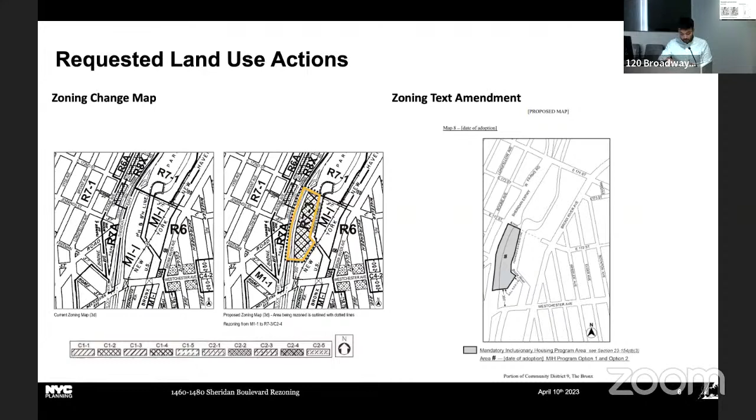In order to facilitate these developments, the applicant is requesting a zoning map amendment to rezone from the existing M1-1 light manufacturing zoning district to an R7-3 medium density zoning district with a C2-4 commercial overlay. Coterminous to the project area, the applicant is proposing to modify Appendix F of the zoning resolution to establish an MIH area with options 1 and 2 over Block 3017.

Together with the land use actions presented today, the development would be facilitated by additional actions still being reviewed under a separate application to facilitate public access to the waterfront. For Site 1, 1460 Sheridan Boulevard, a waterfront certification would be required. The approximately 18,000 square feet waterfront public access area at this site would have an open to the public connection to Starlight Park at the north. The short public walkway would include a connection to Sheridan Boulevard at the south and would contain walking paths, vegetation, lighting, seating and tables, bicycle racks, and waste bins.

For Site 2, 1480 Sheridan Boulevard, DCP is also reviewing under the same separate application a waterfront certification and a waterfront authorization to waive visual corridor requirements. The approximately 20,300 square feet waterfront public access area at this site would have an upland connection and a visual corridor developed along the northern lot line of the site between Sheridan Boulevard and the Bronx River. Another access from Sheridan Boulevard to the waterfront would be through a second visual corridor and public access area provided between Building 2 and 3. This space would be improved with an amphitheater, vegetation, lighting, and other passive recreational uses.

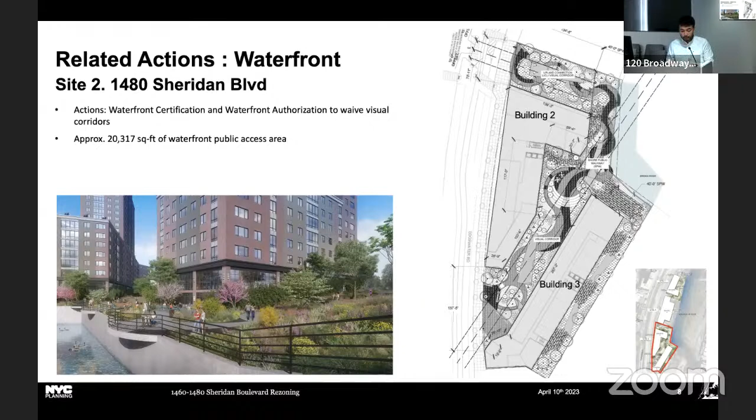Related to this visual corridor, the waterfront authorization to waive them is intended to allow the flexibility needed to provide the visual corridors by modifying their location in order to make the building footprints more efficient given the site characteristics. On the left part of this drawing, you can see visual corridor 1 with the required location in purple and the alternative proposed location in green. By pushing the visual corridor to follow the property limit, this prevents the generation of a residual space of 35 feet towards the property line. On the right, between the two buildings, you can also see the required visual corridor in purple and the proposed one in green.

Regarding the environmental review, a notice of completion of a draft environmental impact statement was issued on April 7th of this year. The EIS identifies significant adverse impacts with respect to transportation traffic, transportation pedestrians, and construction traffic, and no other significant adverse impacts were identified. Mitigation measures are identified in the EIS and will be explored further in the final EIS.

Before moving to the Community District Board and Borough President recommendations, it's worth mentioning that certification of this application was on April 10th. Community Board hearing was on May 18th, approving the proposal with 27 votes in favor. Borough President held a public hearing on June 15th, and the CPC's public hearing is scheduled for July 12th, also covering the draft environmental impact statement of the proposed development.

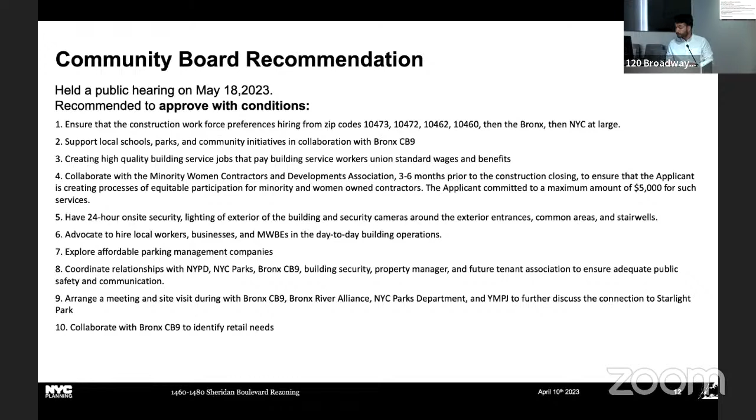To give some responses to the questions raised during the review session, regarding density and height of buildings, the applicants responded that the surrounding area is comprised of zoning districts R8X, R7A, and R7-1, and directly across Sheridan Boulevard are the Compass residences, consisting of 6 buildings approved in October 2011 as a large-scale general development special permit and a rezoning to R8X. The applicant finds these facts sufficient to argue that the density and height of the development is appropriate for the area and consistent with the neighborhood.

Regarding building architecture and materials, the building base will include articulation features and changes in materiality to bring the buildings to scale at the pedestrian level. The architect will be prepared to discuss materials and design at the public hearing.

Regarding the 1480 Sheridan Boulevard visual corridor, the applicant is requesting the waiver as a means of procedure, but objectively it is a request of modification to provide the same width of visual corridor, but relocated to mitigate the irregular shape of the site and be able to provide a larger amount of units and open space.

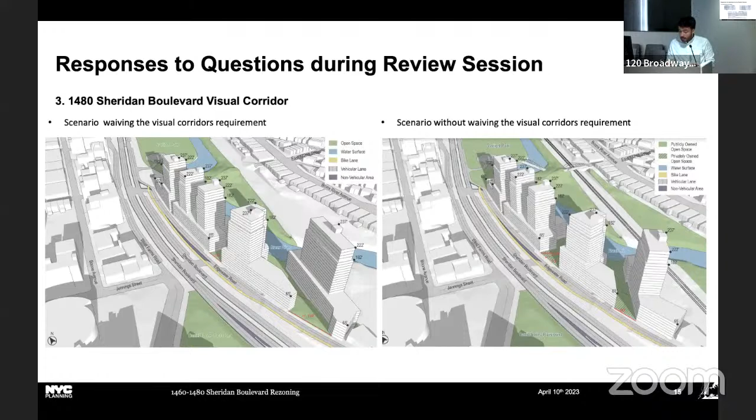Regarding AMI and unit breakdown, on the screen we can see preliminary numbers that don't vary from the review session for certification. The applicant has been meeting with Housing Preservation and Development over the past months, most recently on June 26th, and will continue to work with HPD and apply under HPD's Mix and Match program. Information on the rationale behind the quantity of 3-bedroom units hasn't been received from the applicant.

Regarding the consideration of the Bronx River Greenway, the applicant has been working with Parks to ensure a well-designed open space that works as a transition to Starlight Park, providing open connections to Sheridan Boulevard throughout the 2 sites, and they are seeing this as a continuation of the Greenway.

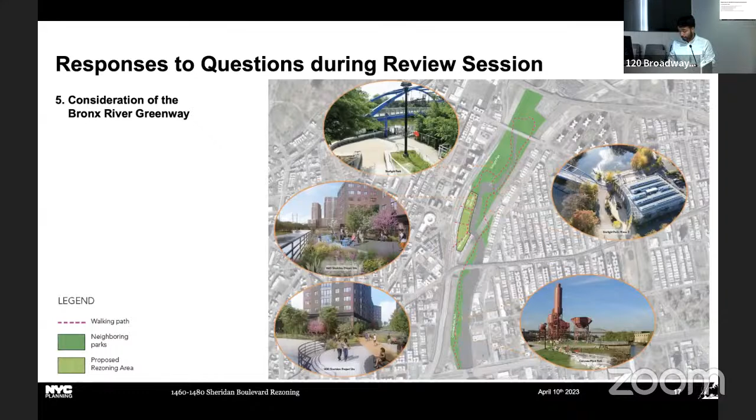Regarding community outreach efforts, in addition to working with Community Board 9, Borough President Gibson, and Council Member Salamanca over the past few years, the applicant met with Community Boards 2 and 3, which are adjacent to the Community Board where the proposed development is located, the Bronx River Alliance, the Youth Ministries for Peace and Justice, and the Bronx Chamber of Commerce.

Through a recommendation letter with a resolution of approval with conditions, the Borough President's Office expressed support to the applicant, pointing out an outstanding trajectory as developers in the Bronx. They explicitly support the rezoning from a manufacturing district to stop pollution problems from either direct or indirect runoff into the Bronx River. They also support the height of the buildings, recognizing there are trade-offs needed to increase the amount of housing in the borough and provide quality open space.

The recommendations from the Borough President to fully approve the proposed development include increasing the amount of 2, 3, and 4 bedroom units. She also included accomplishing a seamless connection to Starlight Park and making the commercial space a restaurant, a cafe, a supermarket, a daycare, or a recreational or educational use. She requested working to accomplish a better depicted high-quality design of the buildings and coming back to the Borough President's Office for approval before going to the Department of Buildings. Finally, she recommends that when hiring, the developer makes use of union labor, hiring locally and minority and women-owned business enterprises. With that, I conclude my presentation.

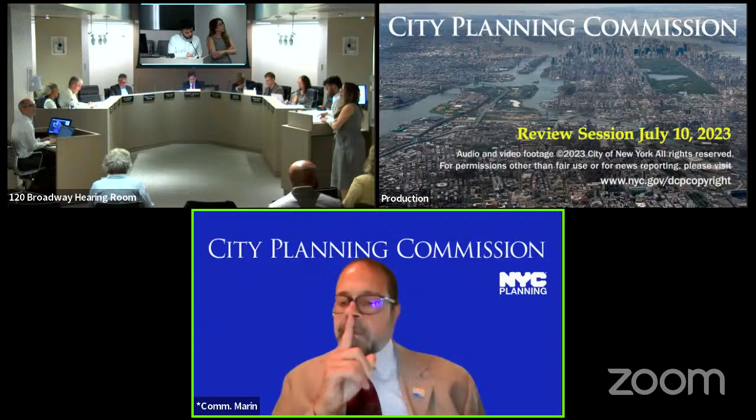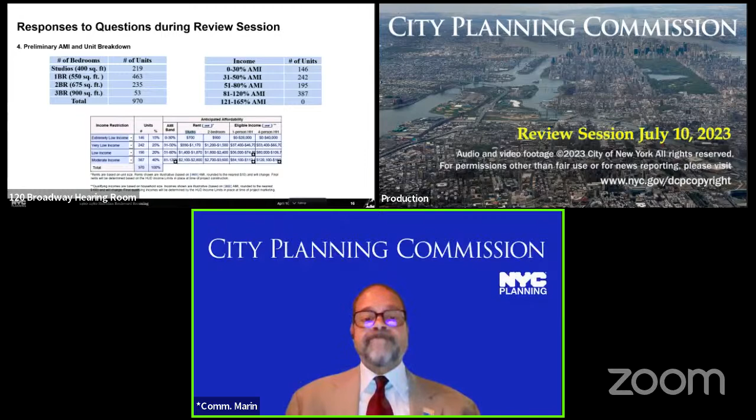And then one last statement: I do certainly appreciate, and I know that the borough president also made comment on design. This newest rendering clearly shows that there's been some thought to breaking up the space and then bringing in some high quality design for that area, so that's appreciated. And that would be it for today. Thank you so much. Thank you.

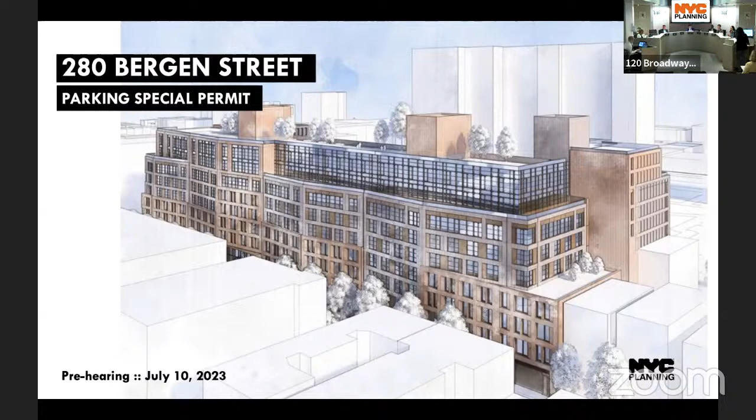This is a private application for a special permit to waive off-street parking requirements to facilitate a 4-building, 238,000 square foot mixed-use development with a total of approximately 300 apartments, including 80 income-restricted apartments in the Boerum Hill neighborhood of Community District 2 in Brooklyn. As the Commission may recall, the project area is in the southern edge of the Boerum Hill neighborhood between downtown Brooklyn and Gowanus. The recently approved land use actions on this block include the 280 Bergen Street rezoning adopted in December 2022 and the 98 3rd Avenue rezoning adopted in June 2022, shown here in yellow and blue respectively. The proposed action is a follow-up to the 280 Bergen Street rezoning application. The applicant is seeking this special permit to waive all required parking spaces per recommendations from the Community Board and the City Council made during ULURP for the previous rezoning application.

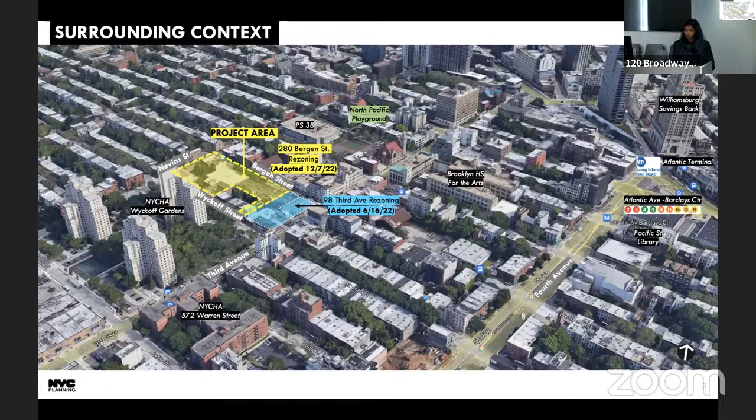The proposed development is a 4-building mixed-use development comprised of 2 9-story buildings with residential, commercial, and community facility uses, and 2 townhome-style residential buildings. It would have a total floor area of approximately 238,000 square feet, including 218,000 square feet of residential space, 9,600 square feet of commercial space, and 10,000 square feet of community facility space.

The proposed development would include approximately 300 dwelling units, of which a total of 80 units would be income restricted pursuant to MIH Option 1, and a community benefits agreement through which the applicant has agreed to provide 5 affordable units in addition to the MIH requirement.

Parking is required for 50% of the market rate units in R7A and R7D districts. The applicant is seeking to waive this requirement per the proposed special permit. The previously proposed ground floor parking garage would be replaced with an outdoor space for resident use.

The applicant is seeking a special permit pursuant to Section 74-533. No parking spaces are required for the income-restricted units in the transit zone. The R7A and R7D districts require parking spaces to be provided for 50% of the market rate units, which would generate a requirement of approximately 110 spaces. Within the transit zone, the Commission may permit a reduction in the parking requirements in accordance with the provisions of the special permit. The applicant is seeking to waive all required parking spaces.

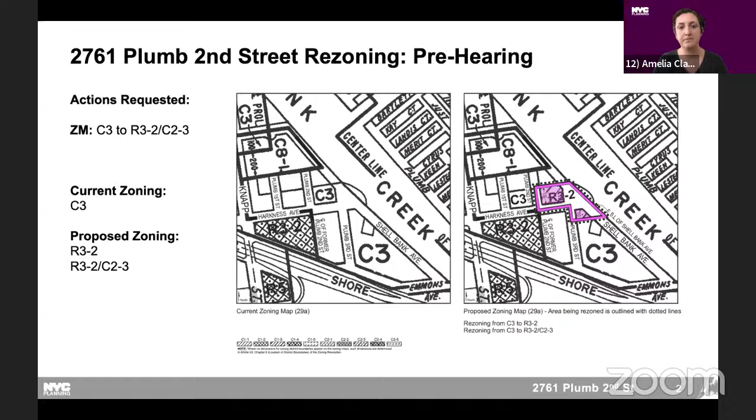On May 23rd, Community Board 15 voted favorably for the application with 33 in favor, 1 against, and 1 abstaining. The Brooklyn Borough President has not yet submitted a recommendation for this application. Thank you, and I'm happy to take questions now.

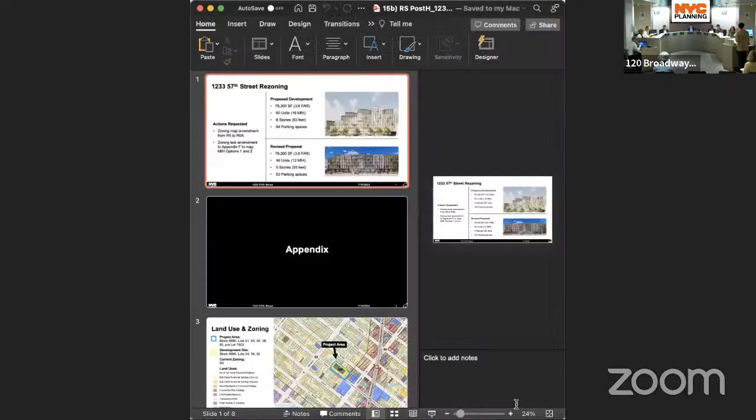Great. And last but not least, 1233 57th Street rezoning, and Emily Bachman is here. Good afternoon. Last one. We're late in the day, but you have our full, undivided attention. Thank you, it'll be pretty quick too. Here we go. Okay, good afternoon.

The department supports this application, which would facilitate the development of a new 8-story residential building with 60 units, 18 of which would be permanently income restricted at 1233 57th Street in the Borough Park neighborhood of Brooklyn, Community District 12. The current R5 zoning has been in place since 1961 and does not include opportunities for growth. Community District 12 has seen some of the lowest levels of housing production in the city. Since 2010, the district's supply of housing units has grown by just 3%, far outpaced by 8% population growth over the same period. The change in zoning of the district to R6A would allow for growth in a way that is in context with the neighborhood and reflects the site's location near a subway station at the convergence of 2 wide mixed-use commercial corridors and between R5 and R6 districts.

R6A is a contextual zoning district that serves as a transition zone between R5 and R6 districts on either side of the project area and has transition rules which require setbacks and height limits adjacent to the area zoned R5. The zoning text amendment would ensure that future developments in the project area will provide permanently income-restricted housing that is sorely needed in Community District 12, where just 95 new income-restricted units have been constructed since 2014. Both the certified and revised versions of the proposed development would take full advantage of the maximum floor area ratio available through the proposed R6A district, and the department believes either plan would be appropriate. We support the height, massing, and higher unit count reflected in the certified proposal and the reduced number of parking spaces included in the revised plans.